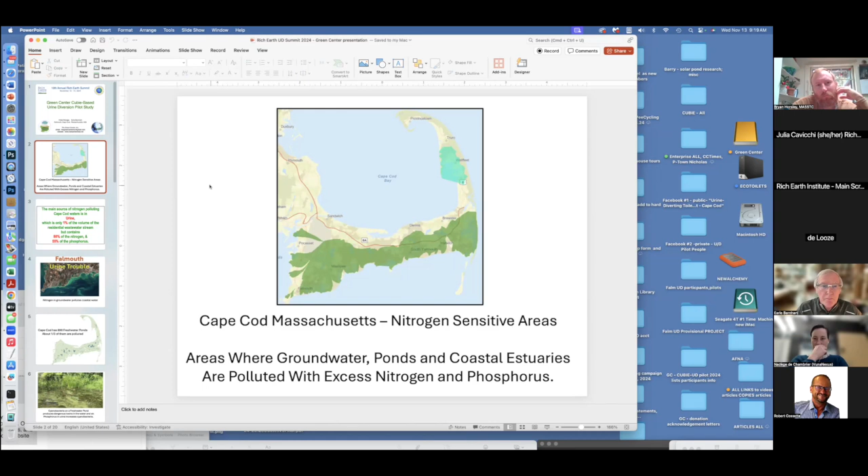And the reason is that the urine that goes into the septic tanks from the flush toilets contains 80% of the nitrogen from the home and 55% of the phosphorus, but it's only 1% of the volume of the water leaving the house. So the most efficient way to control the urine that's polluting the Cape is to stop the urine from going down into the septic tank and into the groundwater and polluting the natural waters.

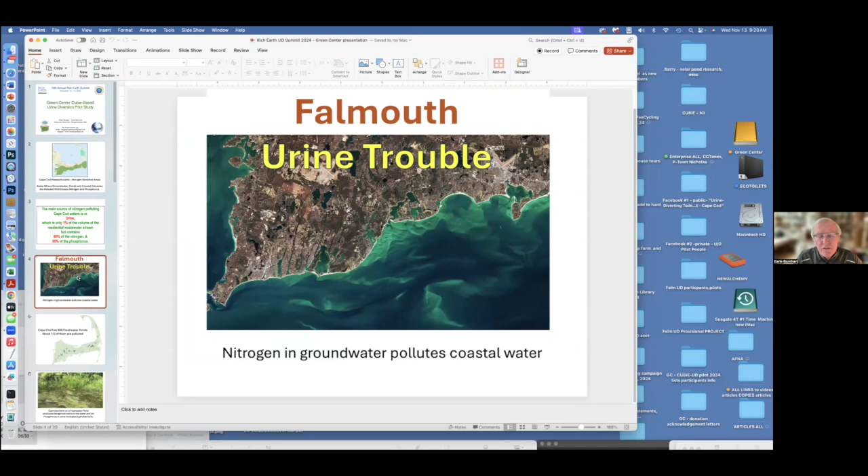Our town is called Falmouth. It has 30,000 people. It's in this picture. And if you look on the shoreline of the Cape near Falmouth, the nitrogen is seeping out of the ground into the ocean and causing pollution and algae growth along the edges, as well as in all of the water bodies on the land.

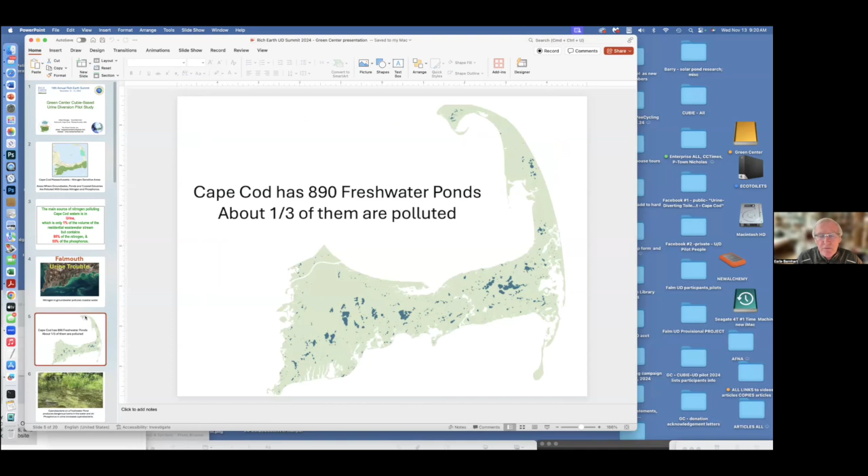Cape Cod has 890 freshwater ponds left over from when there were glaciers here. 1/3 of them are so polluted with nitrogen and phosphorus from the housing that they grow cyanobacteria, toxic, dangerous bacteria on the surface of the water, usually in the summer, and it's poisonous. You can't touch it, you can't swim in it, you can't drink it. If your dog swims in there, your dog will die. It's a very serious problem, and it's one of the major incentives for Cape Cod to try to figure out some way to control the nitrogen.

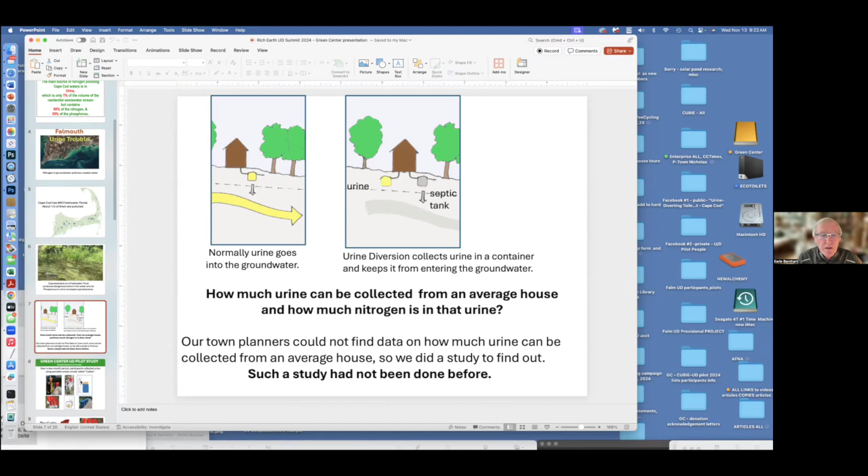When we proposed that the town use this technology, they said, well, how much urine can you collect? And we had someone research it, and there was no good data anywhere in the world for how much people could practically divert and collect. So we decided we would do a study here on the Cape to find out. This study had never been done before.

What we did was we gave out Cubies from the Rich Earth Institute to 41 homes, and they collected urine voluntarily in each home. Each home averaged about 1.5 people who were doing this. They put the urine into Cubies, then they put the Cubies collected and put them into 55-gallon plastic drums. And then for 2 months, we did that.

We use Cubies because they are perfect for this experiment. They're cheap, they're easy to use. Men and women can both use them. They're portable. You can put them in your bathroom. You can put them in your back porch. You can put them in your garage. You can put them anywhere. They have a ball in the Cubie's funnel so that the urine goes down, but the air does not come up. Odors don't come up.

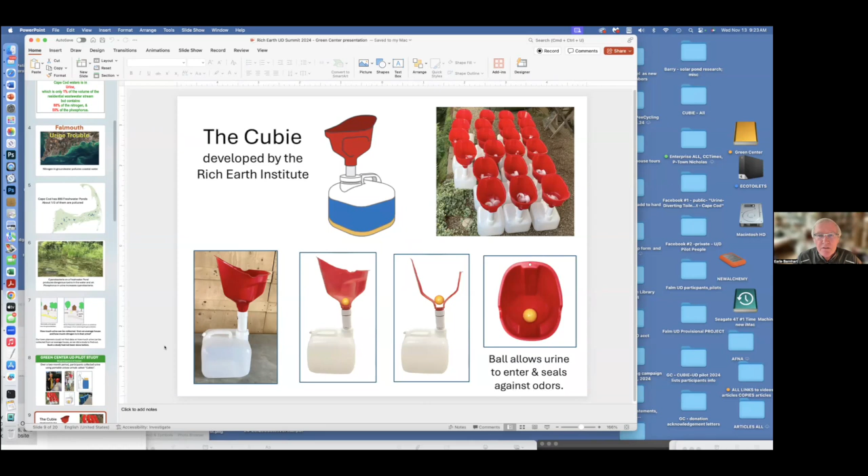This is a standard Cubie that we used. Men and women can both use these Cubies. Men stand up in front, women squat down behind. And in 1 year, if a person collected all of their urine, you'd get 120 gallons per person. We collected for 2 months, and then we extrapolate up to a year to see what would happen if you did it for a year.

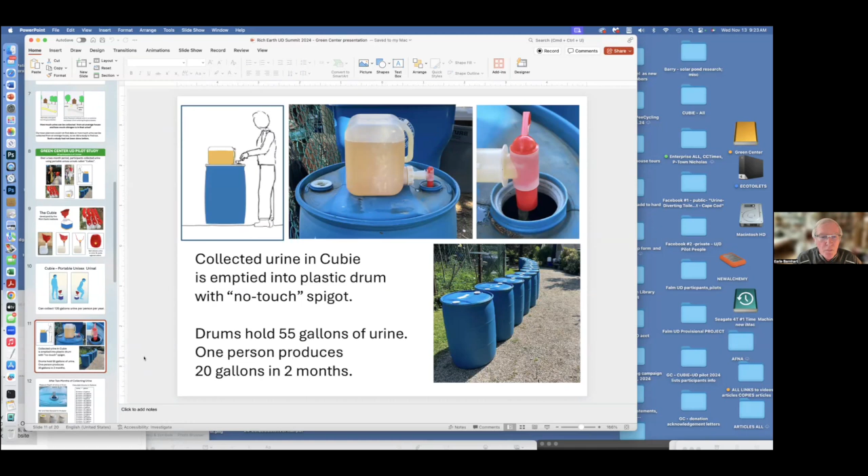So the logistics of this was the person would collect in the Cubie. They would dump it into the 55-gallon drum with a no-touch spigot developed also by Rich Earth. So that was necessary for our Board of Health so that people did not touch the urine at any point in the process. We collected the urine for two months in each home. At the end of the 2 months, we would measure the depth of the urine in the tank. And depending on how deep it was, we calculate how many gallons were in there.

And then a sample was taken from the drum to test for the amount of nitrogen and phosphorus in it. And it was stirred first because the struvite crystals sometimes go to the bottom and should be included in the sample. So it was stirred and then tested. The sample was taken to a county lab, so it had a high quality proof of what was going on in it. It was the Barnstable County Water Lab.

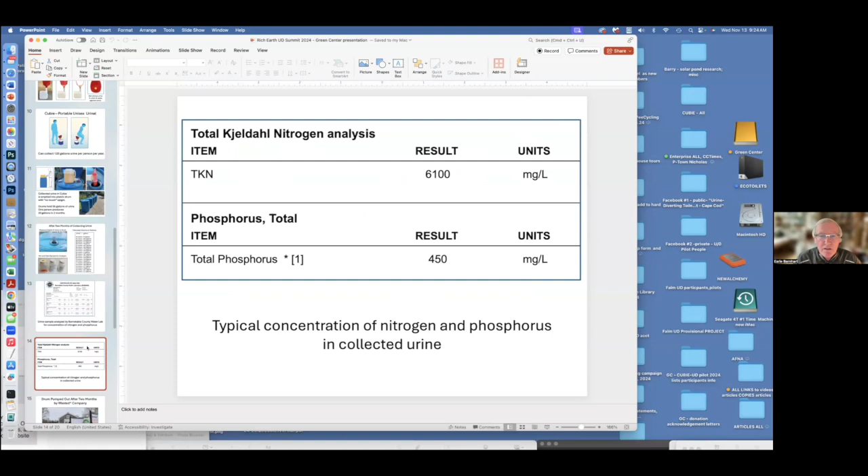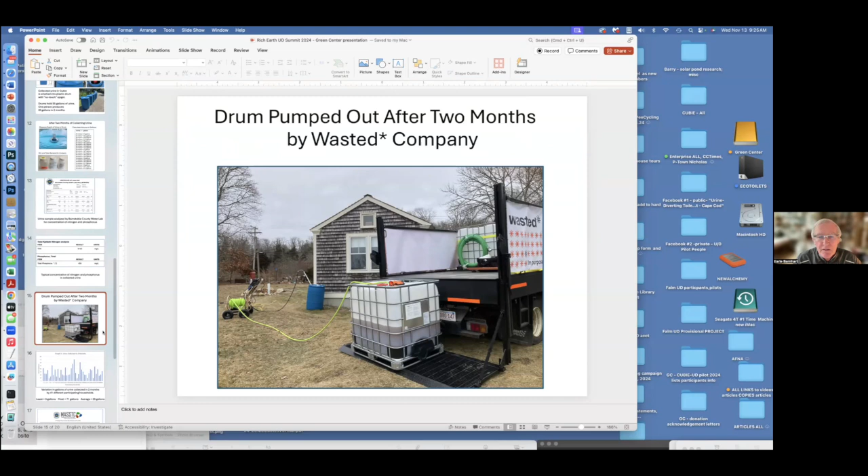Each home then was given results of how much nitrogen was in their urine. And then with the amount of nitrogen in the urine and the amount of urine, you can find out how many pounds of nitrogen was collected in these drums. At the end of the 2 months, we had Wasted come by, pump out the 55-gallon drums, take it away, and take it to an approved disposal place.

For each of the homes, different amounts of urine were collected. Some collected a lot, some a little, depending on how many people did it, how often they did it, whether they went away from home for a while. These were like average conditions for average people. The least collection was 9 gallons, the most was 71 over 2 months, and the average was 29.

The science of this project was managed by the MASSTC Alternative Septic System Test Center on the Cape. Bryan Horsley, who's at this summit now, was the person who did the measurement and the sampling and the collection and wrote the report. The final report was published by MASSTC, and it described the process, it described the findings, and it described the implications of the advantage of this.

And the basic quantitative information was it showed that a 2-month study, typical household, 1.5 people, if you extrapolate that up to a year, would remove 9.7 pounds of nitrogen and 0.64 pounds of phosphorus from a home using Cubies voluntarily in this manner. This is about the same amount of nitrogen removal as a sewer when you do the numbers, and it's at a tiny, tiny fraction of the cost of a sewer.

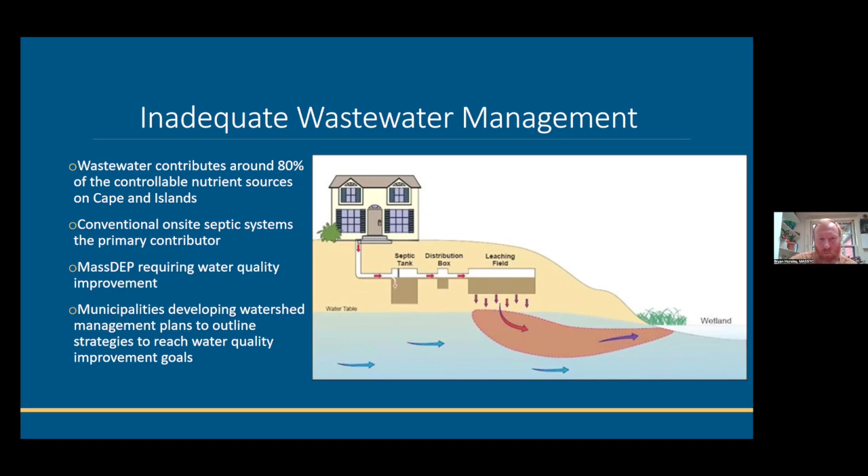So the Massachusetts Department of Environmental Protection, our state environmental regulatory agency, is requiring that towns do something about this. The regulatory teeth are into the towns, asking them to come up with what they call watershed management plans to improve water quality in all of those impaired waters. And those watershed management plans entail a variety of strategies, which I'm going to get a little bit more into here.

Like I mentioned, individual towns are working on planning to improve water quality through their watershed planning. Many of them are relying on expanding their sewer systems, so they're actively working on that. Some of the problems with that, though, are one, that it's extremely expensive, and two, that it's really going to take decades to implement those systems.

And then the other problem with relying on sewering and watershed planning is that at best, the maximum sewering plans will cover about 40% of the homes on the Cape, leaving the majority, 60%, to still be addressed with on-site either advanced septic systems or other approaches.

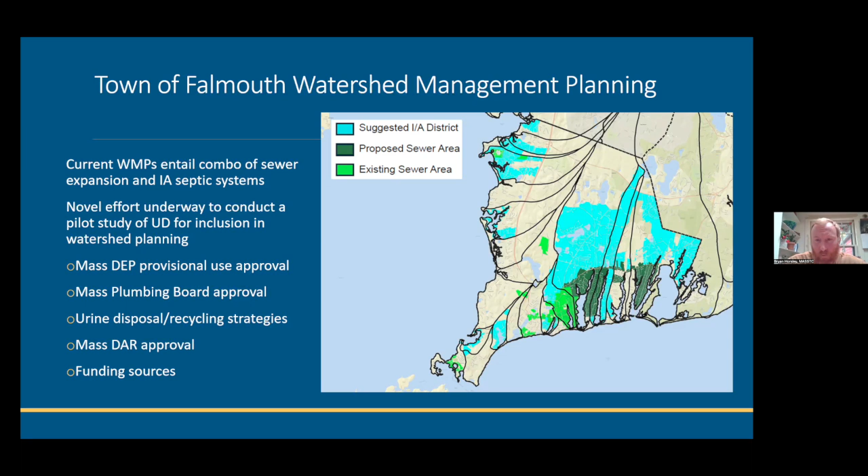And then, of course, we need funding because, as the next slide will describe, we're needing to install 50 urine diversion systems and sample and monitor them for a period of 3 years in order to meet the requirements from our Department of Environmental Protection.

So that's the plan. Right now we have a list of around 150 people, which the Green Center have helped compile among other colleagues. And we're looking to install 50 urine diverting systems mostly in residential homes, and then sample and monitor them for 3 years. And the goal of that is to gain a better understanding of what total nitrogen or phosphorus load we can remove from the watershed. And there are two different ways of looking at it.

One is sort of cumulatively, if we collect all the urine within an impaired watershed, measure the nutrient concentration, measure the volume, then we can say exactly how many pounds or kilograms of nitrogen we removed from that watershed, and hopefully the town will be able to get credit toward meeting their water quality improvement goals.

Bryan, we've got 1 more minute. Sorry, what was that? We got 1 more minute on your presentation. Okay, this is my last slide.

And so the alternative way to look at it is by measuring the remaining nitrogen content in the septic tank. What that will do is allow us basically to see how much nutrients are left over after doing urine diversion, and that will allow sort of an apples to apples comparison with the advanced septic systems.

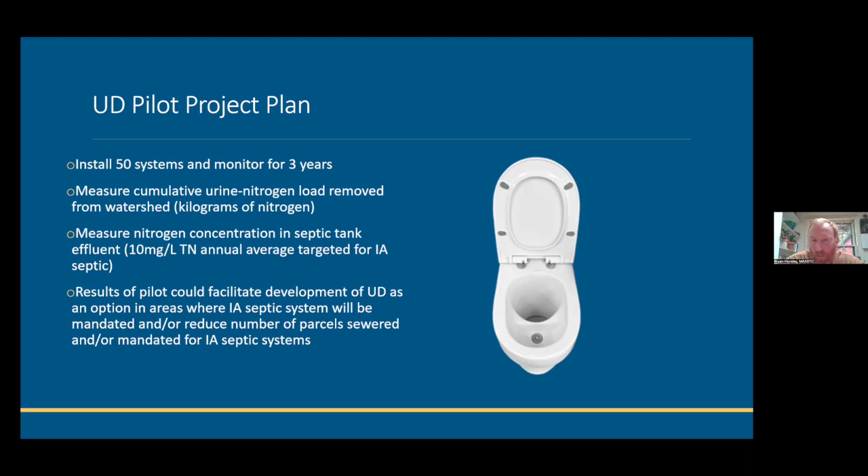And the overarching goal of all of this is to explore whether urine diversion can remove enough nutrients from these impaired watersheds to work towards those water quality improvement goals, and potentially offset the need or reduce the need for expanded sewers or mandated installation of IA septic systems or advanced treatment septic systems.

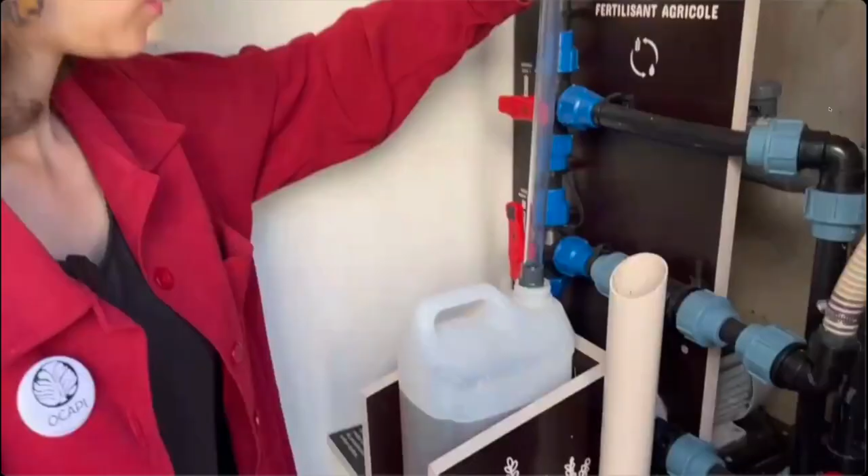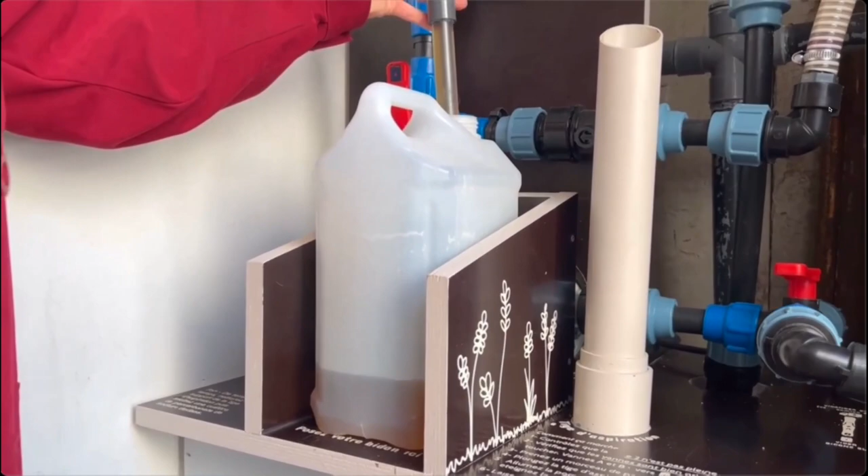So I'm going to make a demo of the pumping station. So pee cyclers put the 5-liter container at the place. Then people open the container, take the pumping stick and plunge it in the 5-liter container. After that, you just activate the pump and it will pump out urine in the tank. And it's done. There is a vent that brings all the air from the tank outside of the building so that you never smell the air of the tank. They also have soap available and hand sanitizer.

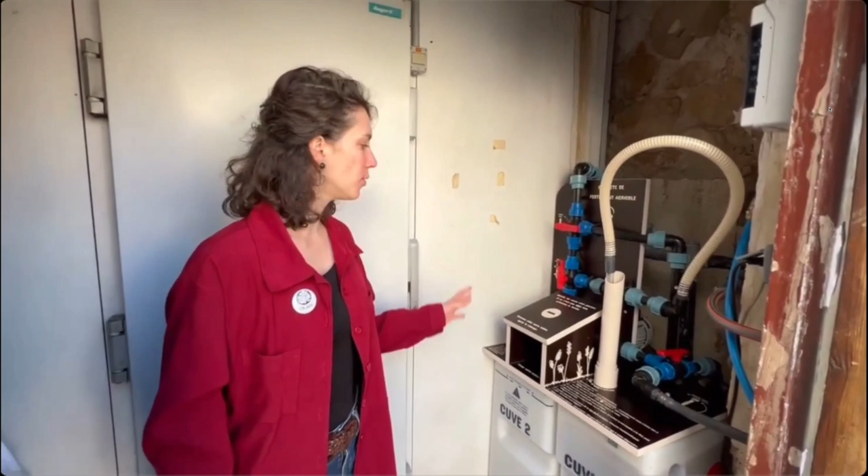When the 300-liter tank is full, then the pee cyclers have to contact the farm, but also to put this sign on the top of the pumping station so that people know that the tank is full and you can't put your urine anymore in it. Urine collection by the farm. When the farm comes for delivery, they can get urine in their truck. They just have to turn these valves so that it will reverse the pumping system. Thus, it means that when you activate the pump, it takes urine from the tank and brings it outside in another pipe. We installed specific tanks in their delivery trucks so that they can transport urine safely.

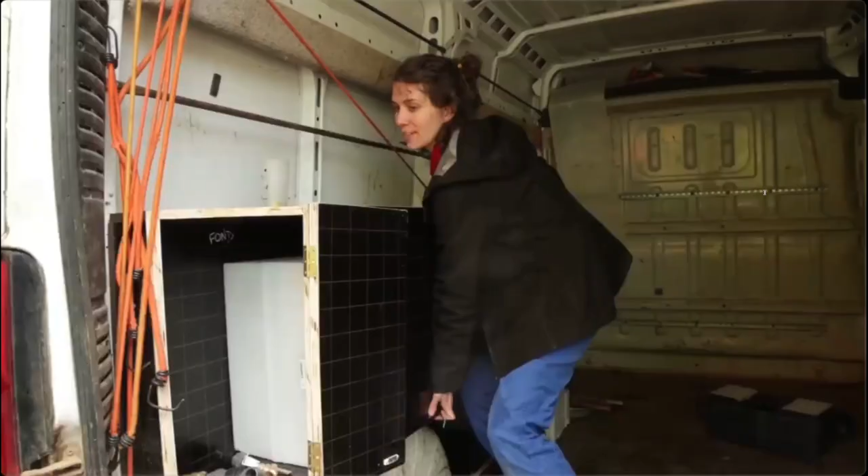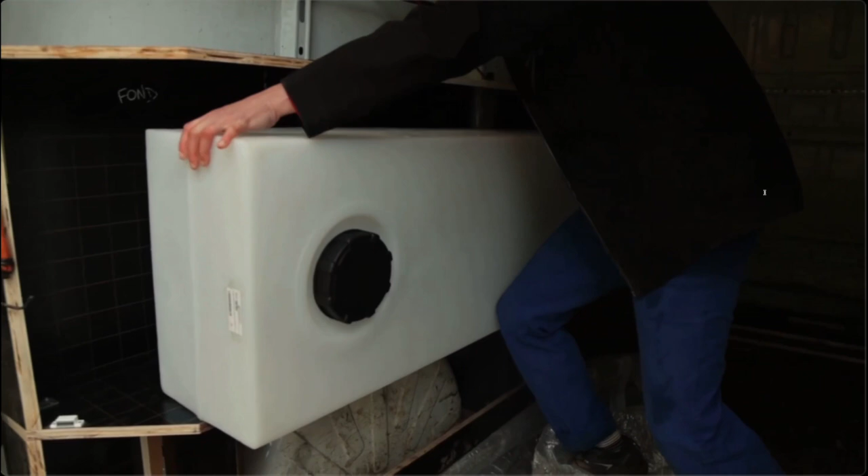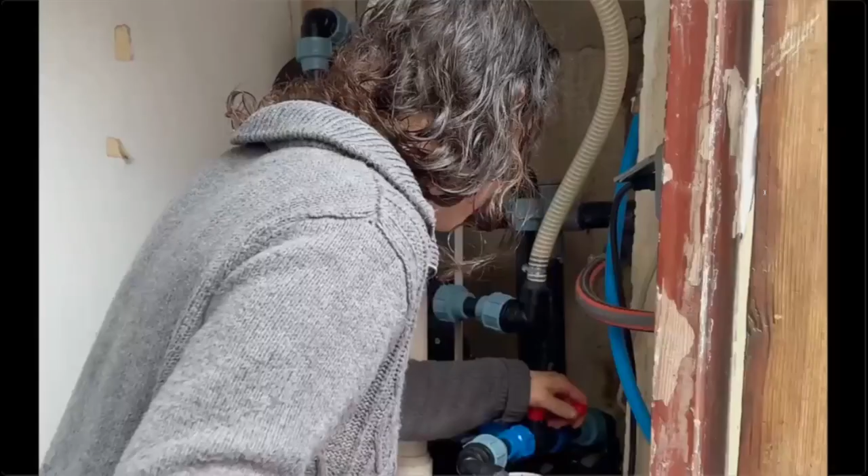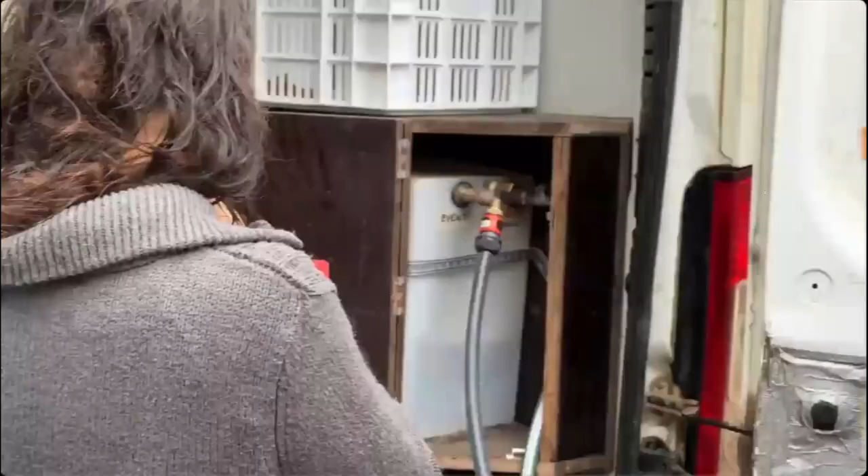We decided to install them permanently because other configurations with foldable tanks or portable tanks didn't seem convenient for the farmers. Since the truck is totally full of vegetable crates for the outward journey, we decided to install the tanks above the wheels in the back of the truck, where no crates can fit. As I said, farmers use the same pump as pee cyclers. They just move the valves to modify the pumping configuration. They can fill their truck in about 15 minutes, which is not that fast, but okay for the time they have. Also, the capacity of the truck is right above the capacity of the urine depot so that it would never overflow in the truck.

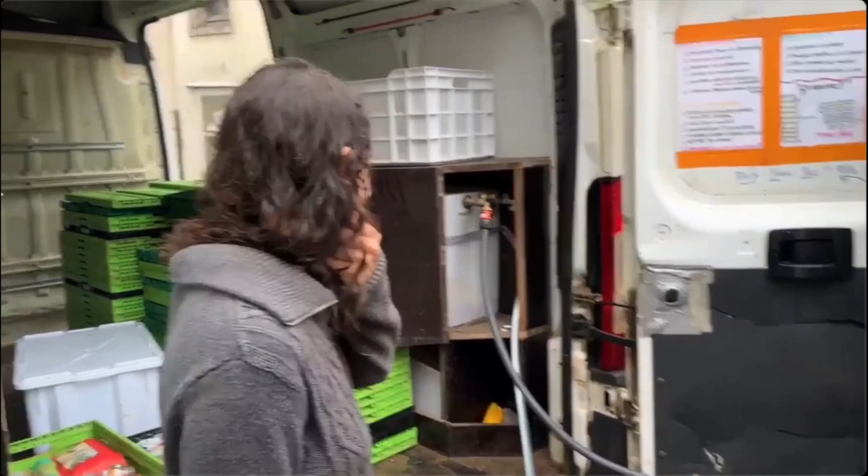Everything was designed in order to prevent spills and odors and to make sure that no one is exposed to urine. Farmers just connect pipes and activate the pump. Small valves prevent piping from dripping. Odors are managed through a vent that is connected on the tank and goes far from the handler. Then, when their tank truck is full, the farmers are ready to bring back nutrients on the farm.

Urine transfer at the farm. The farm is located 90 kilometers away from Paris in the south direction. When they come back from delivery in Paris, they empty the urine tank from the truck to a bigger tank staying at the farm. They also have a second pump available at the farm for this second transfer. Since people from the farm don't have a lot of time for this task, we paid attention to the fact that they don't have to manipulate urine or dripping pipes. Thus, they have a box available for urine transfer with dedicated pipes and the pump. They connect the pipes to the tanks and the pump. Everything works with easy connection devices so that you can plug and unplug the system very easily.

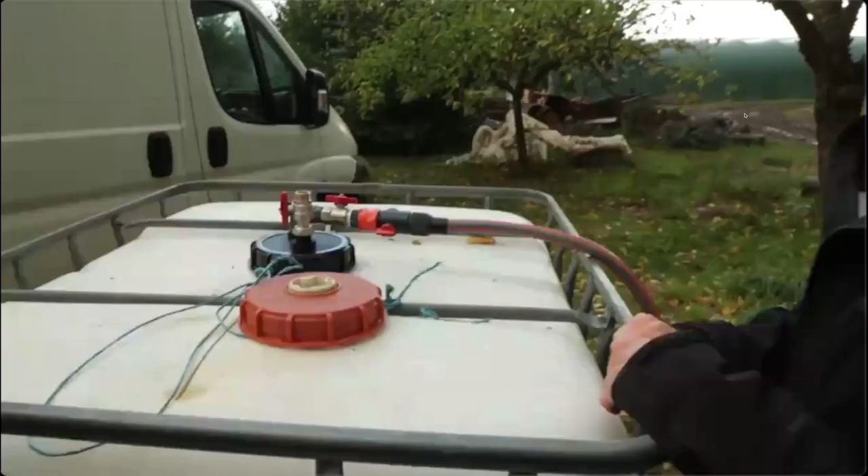For example, we designed this simple cap for the storage tank so that pipes are not plunged directly in it, which would have been very unpleasant to unroll them back afterwards. Pipes are directly connected to the cap. All these precautions with pumps and piping connections were applied because we think that otherwise the project would have been too constraining for people from the farm.

Urine fertilization. For treatment, urine is stored on the farm at least for 6 months, as recommended by the World Health Organization. For now, we only made small tests on the farm in 2024. Indeed, we preferred to focus first on the design of device and protocols for offering convenient logistics between inhabitants and the farm. This farm has vegetable fields but also cereals and flowers. We applied urine on few crops either with a watering can or dripping system.

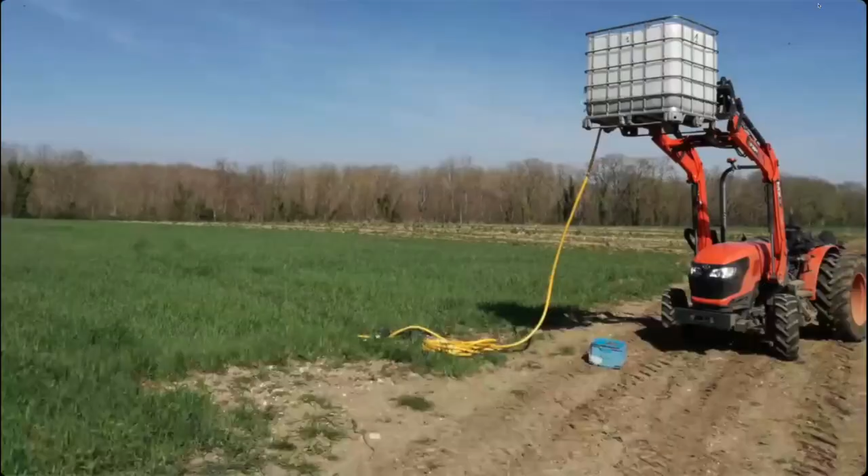As I said, because we didn't have enough time, the farm only proceeded on small fertilization tests, but no real agronomic testing or big-scale fertilization. For example, urine was applied on a strip in the middle of a wheat field. Even very small, this kind of test had major impact on the farm's willingness to follow up the project and proceed with urine fertilization for the coming years.

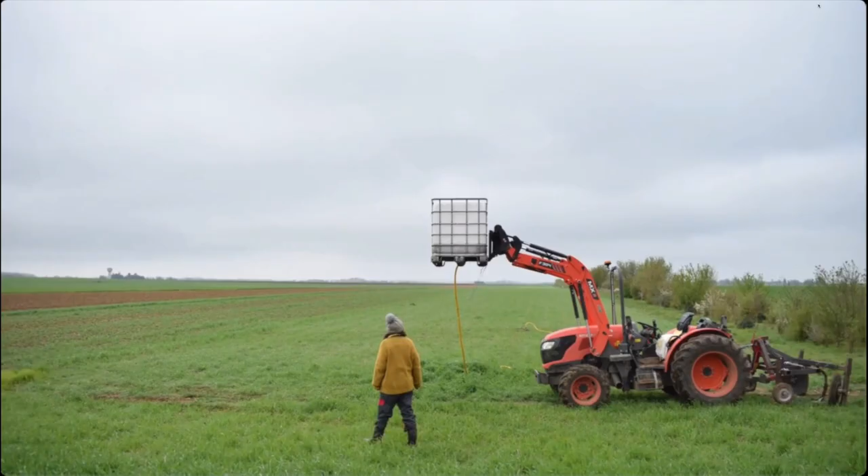These first fertilizations were also an opportunity to investigate the existing tools for urine application, following the WHO instructions for safe conditions. We used, for example, a fertilizer Venturi injector or a motor-driven pump. After these first explorations of urine application in 2024, we decided in January 2025 to take time to develop a specific tool for urine injection in the soil. This tool is also presented by my colleague Loïc at the agricultural session. Since urine has been collected for about 1 year, we hope to do more urine fertilization with this farm in 2025.

For now, we have about 25 pee-cyclers, and unfortunately we won't be able to get more than 50 people in this configuration because the tank of the urine depot and in the truck are pretty small. That said, our goal was to demonstrate that it is possible to organize a urine collection project based on a CSA in a dense urban area without changing your toilet. This is a very symbolic project, and our idea was to make a functional demonstration so that other groups of people can copy the system and adapt to their own context.

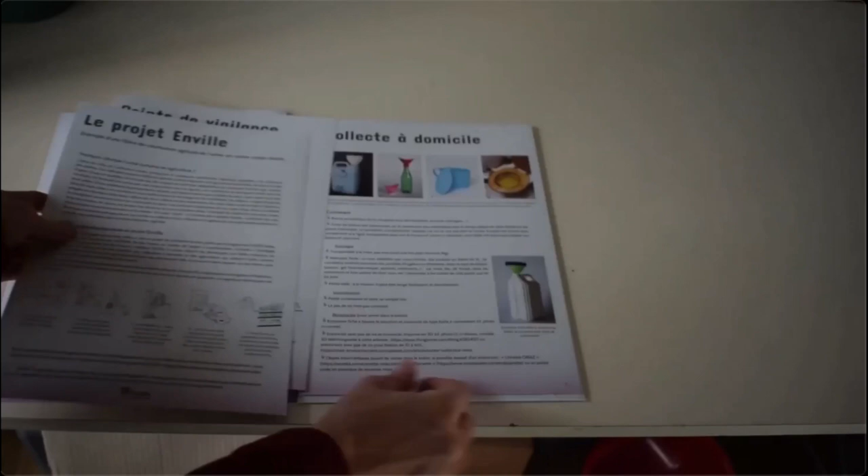On that purpose, we published a report explaining everything we've done. And we also published all the plans of the device we developed. The documents are available online on the website of OCAPI program. The system is functioning since January 2024, but we made a great opening party on September 2024. That was a good opportunity to raise awareness about urine source separation, and we've got a lot of journalists coming. From this moment, we got at least 5 other CSA groups around Paris and further in France who are willing to develop similar projects.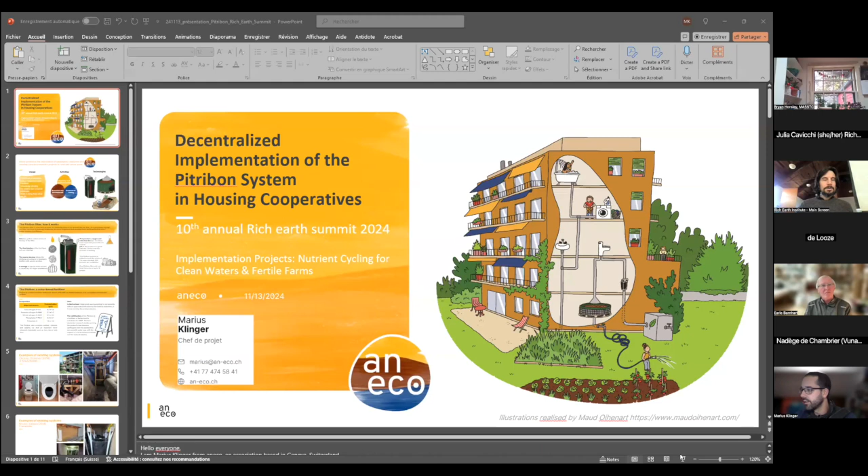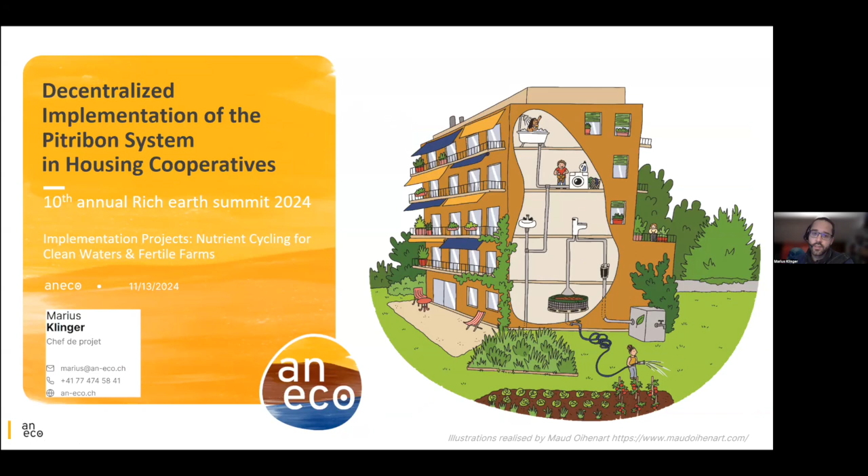So as presented, I'm Marius Klinger from Aneco, a Geneva-based organization. And today I'm going to quickly present Aneco, the Pitribon process, the existing pilot installations and the upcoming systems, as well as the business plan choices for the future.

So at Aneco, we promote the valorization of wastewater resources and develop circular sanitation projects in rural and urban areas. And in order to understand our choices, we try to follow as closely as possible our values, which are horizontal governance, knowledge sharing, which also means that we don't patent our technologies, but we protect them with Creative Commons licenses. And we also look for nature-based and low-tech solutions.

Our 3 main activity axes are the expertise and implementation of decentralized sanitation solutions, research and development, and awareness raising. The main technologies we are developing and promoting are vermifiltration to treat the wastewater, the Cacarosel, which is a dry vermicomposting toilet, and the Pitribon filter, which is a stabilization technology for urine, which will interest us today.

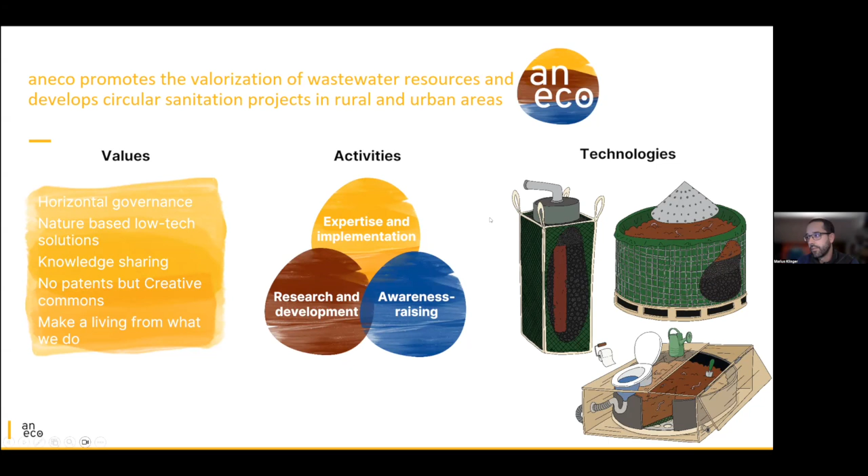The Pitribon process is basically a gravity-driven biochar filter in which nitrifying microfauna stabilizes the urine that percolates through it. One treatment unit, like you see sketched in the middle of the picture here, has a diameter of 60 centimeters and a height of 1 meter 70 centimeters, and is able to treat the urine for 15 people equivalent, to give you an idea.

The urine arrives on the top of the filter in the feeding tank and slowly percolates through the different layers of biochar, fine biochar, then coarse biochar chips, in which the urine is stabilized by nitrification, basically. Here, the most important parameters to control and to monitor for the process to work are temperature, of course, oxygen availability and retention time in the filter.

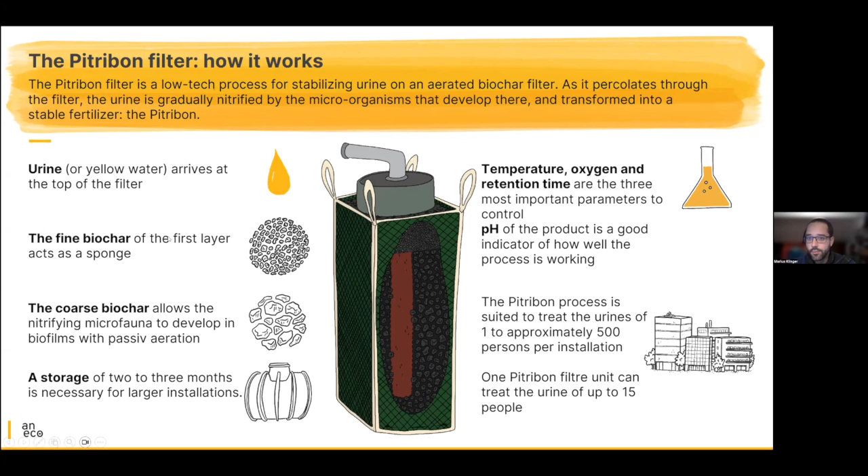For us, the pH of the product is a very good indicator of how well the process is working. Smell is another one also. In good working conditions, there is no smell, and as soon as you have smells, you know that something bad is happening. We think this system is suited for small to medium installations from 1 to about 500 people equivalent. And to increase the capacity of the treatment, you need to add more treatment units like this one in parallel, basically.

The composition of the product itself is very similar to urine composition, with the specificity that the nitrogen is split in two between ammonia and nitrate because of the nitrification, and the pH is around 6. In Switzerland, large-scale use of human urine products is not possible without a certification by federal authorities, like Vuna has done with the Aurin quite some years ago already.

So in order to get this certification, we need to provide evidence about the innocuity of the product and evidence that the process reduces pathogens and micropollutants. And the research that is needed to obtain this certification has slowly started this year, and will really start fully next year. And we are aiming for a certification by 2027.

Now I'm going to quickly show the different pilot sites where the filters have been implemented. The two first pilots were installed in the housing cooperative Equilibre in Geneva. The first one here in Cressy in 2018 with urine diverting dry toilets. For now, the filter treats the urine from 3 of the 13 households that live there, and is constructed in the basement of the housing cooperative. And there is a plan to connect all the households to the treatment.

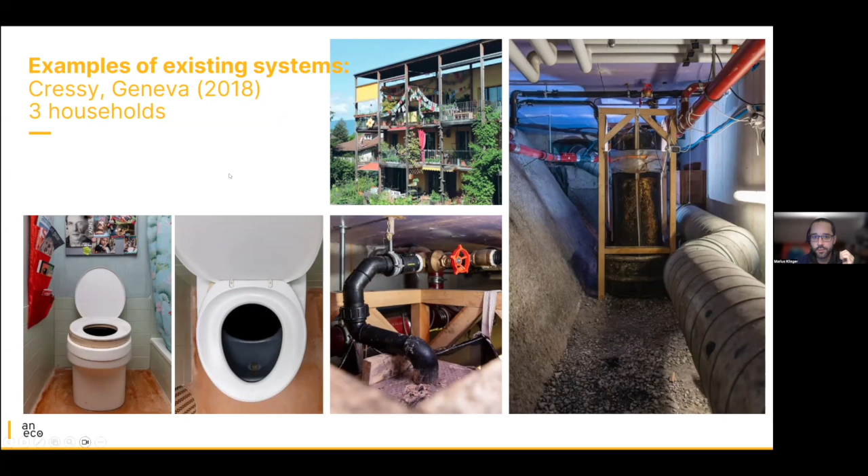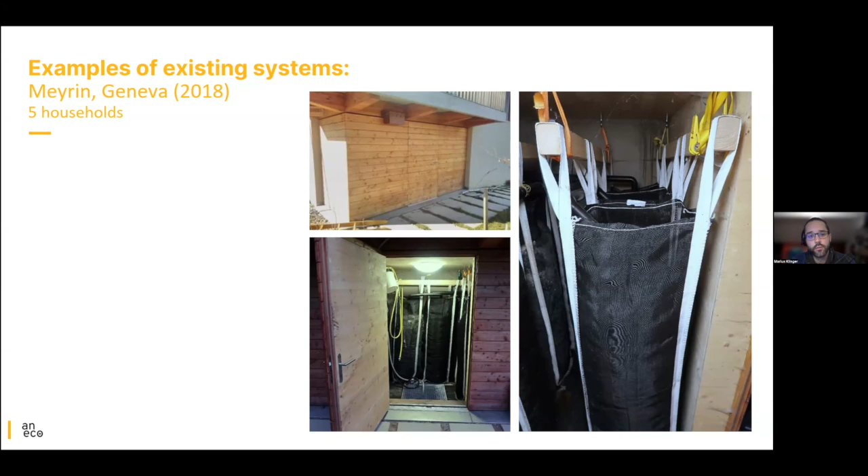The second one is in Meyrin, also in Geneva, constructed also in 2018. And here the system is constructed outside in a little shed below the apartments that are connected to the system. For now, there are 5 households connected, 10 more can be connected to the system. And here, the toilets that are connected to the system are the Wostman urine separating flush toilets.

Recently, we had a new unit installed near the Alps for a new family house, which needed to treat all of their wastewater. We separated the urine with the Laufen Save! toilets and installed also a Pitribon system there.

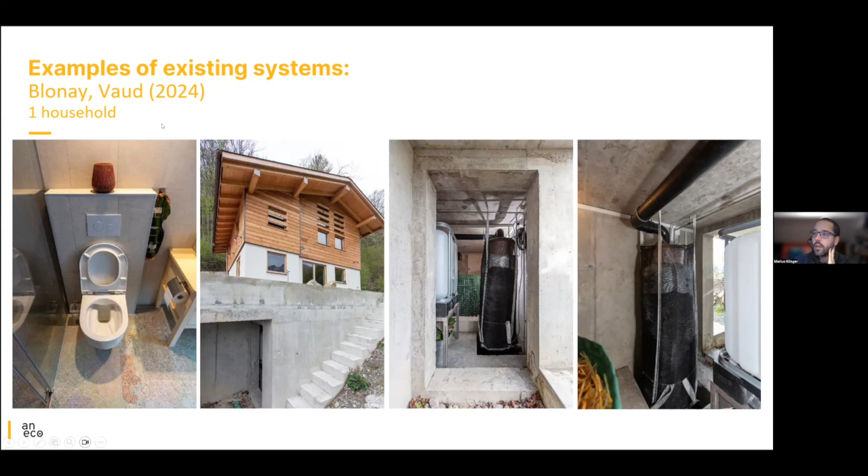And very recently, also near Paris, an installation was constructed, where the system must treat the urine from many urinals in one office building. The annual volume here is estimated at 18 cubic meters, and I'm not sure whether they have already started operation or not. This has to be followed up, basically.

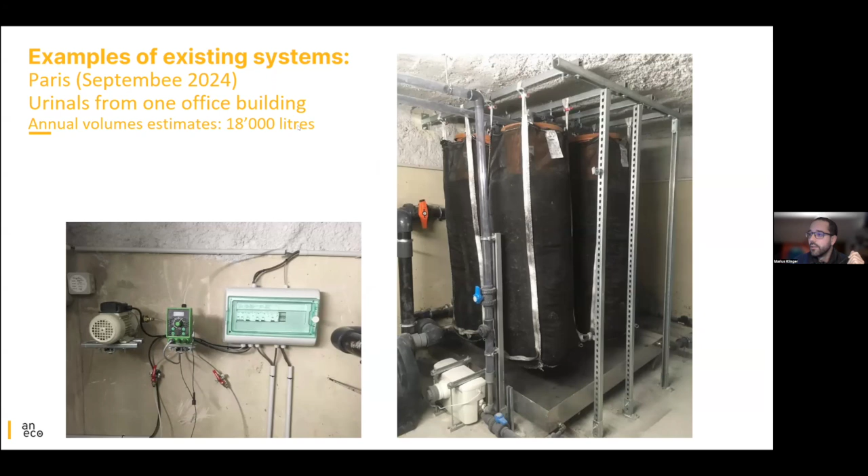Now, except from this last system, we're mainly working in Switzerland, and actually mostly in Geneva region. And with the next planned upcoming system, we are also changing scale with the next system in Archipel here, which will treat 100 people equivalent urine production, and that should start operation around the end of next year. All these future projects are basically housing cooperatives that decided to implement in the Geneva region urine separation, and for most of them also wastewater, decentralized wastewater management and treatment.

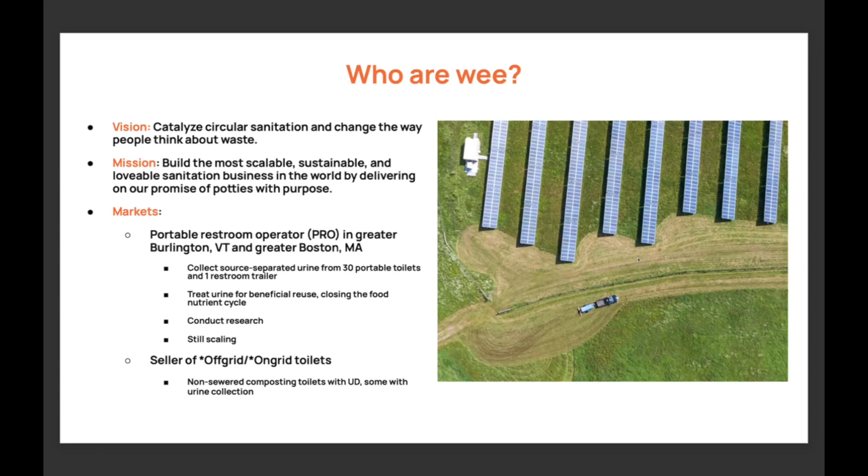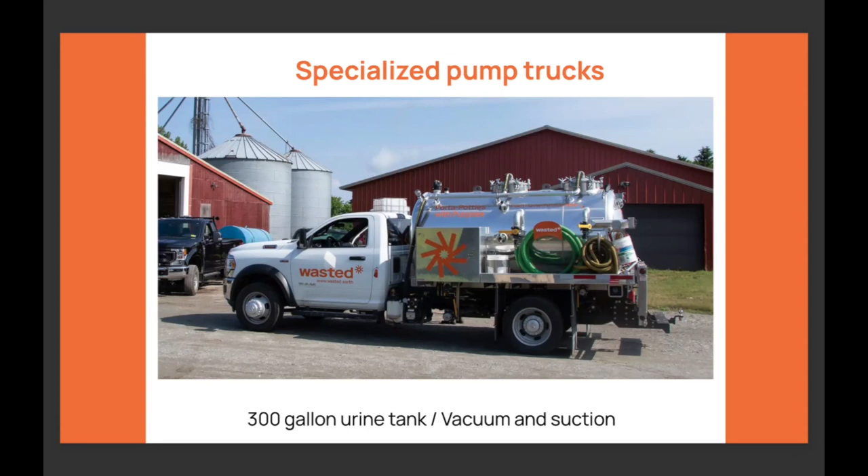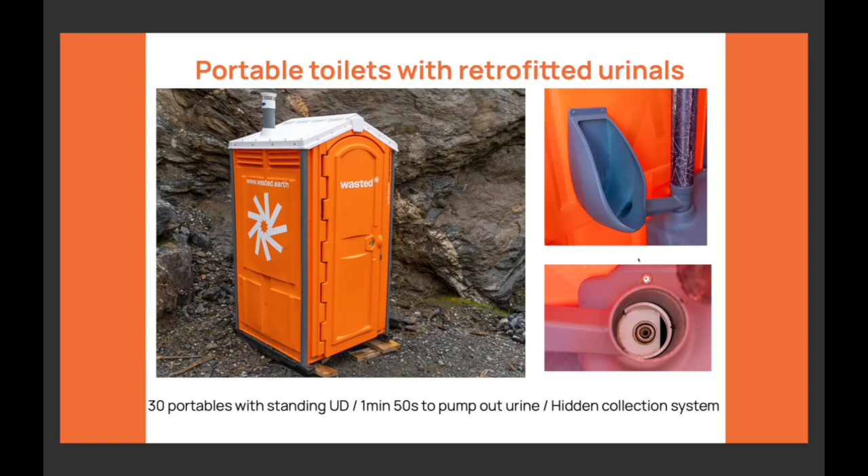Now that truck is used to pump from 30 portable toilets with standing urinals. So those urinals divert to a bladder hidden within the mixed waste tank, so it doesn't look like a urine diverting toilet at all. Now this was a relatively costly retrofit, but it served as a good proof of concept, and we're looking to make some improvements in the next iteration.

We pump also from our VIPee trailer. So this is a restroom trailer with 2 of those off-grid style toilets. So that toilet there, that black thing in the bottom is a conveyor belt. It brings poop out the back to a chamber, and pee runs down the front into some plumbing and a collection tank. So this is relatively new, but it's increased our urine collection about 20% in the weeks it's been in use. And the good thing about this setup is it collects from both the standing and the sitting peers.

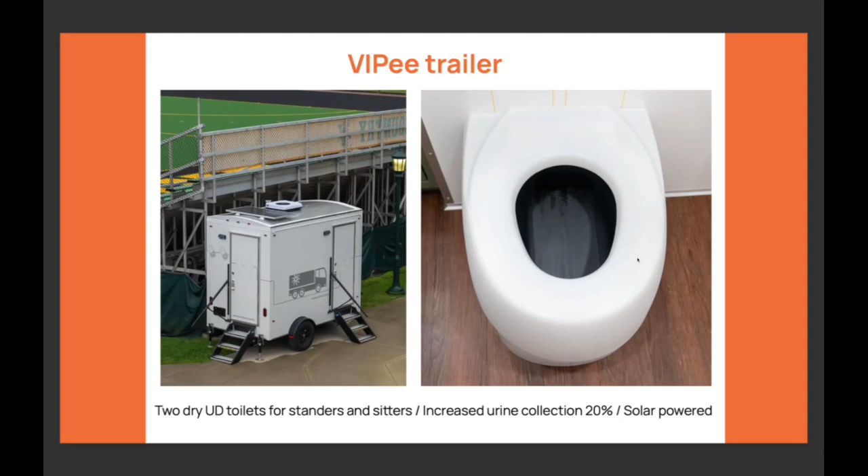And lastly, we collect from on-grid installations. Those are permanent or semi-permanent outhouses with that urine diverted through that off-grid toilet into a collection tank.

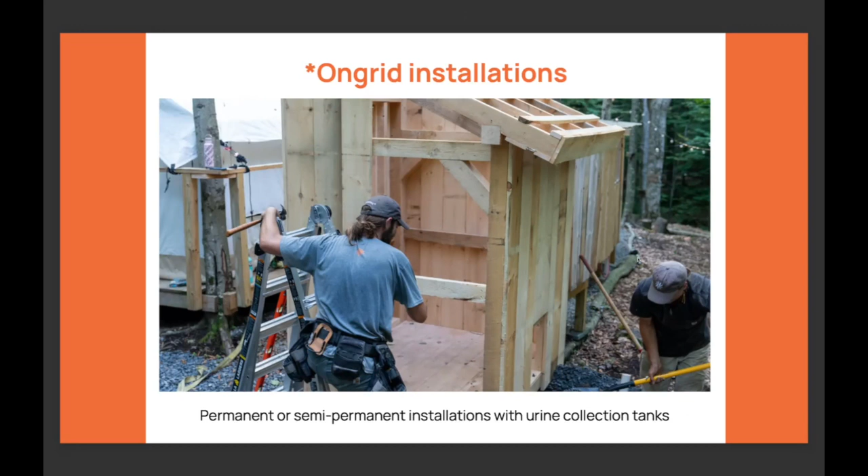Okay, how do we treat the urine? We have a very simple treatment train centered around technology built by Brightwater Tools. So to the left there, we have our Brightwater pasteurizer, and in the back is our Brightwater struvite reactor. Treatment begins with urine being pumped into the building under the truck's pressure.

We then pasteurize it for pathogen reduction following the EPA's 503C biosolid standards. After that point, the fertilizer is considered legal for use in Vermont. But because we work in the Champlain Valley, which is phosphorus constrained, we take this a step further and strip the urine of its phosphorus as mineral struvite.

So with the addition of magnesium chloride, or pet-friendly road salt, the struvite spontaneously drops out of solution, and we filter and wash it. So this creates 3 real end products. Those are pasteurized whole urine with the phosphorus in it, pasteurized stripped urine, which we more often land apply, and struvite, which is our solid fertilizer.

So we've taken a few measurements from our tanks to estimate reactor performance, and we see near complete reduction of phosphate, about 85% reduction in total phosphorus, and measuring our wash water, only about 0.1% of the phosphorus in urine ends up going down the drain.

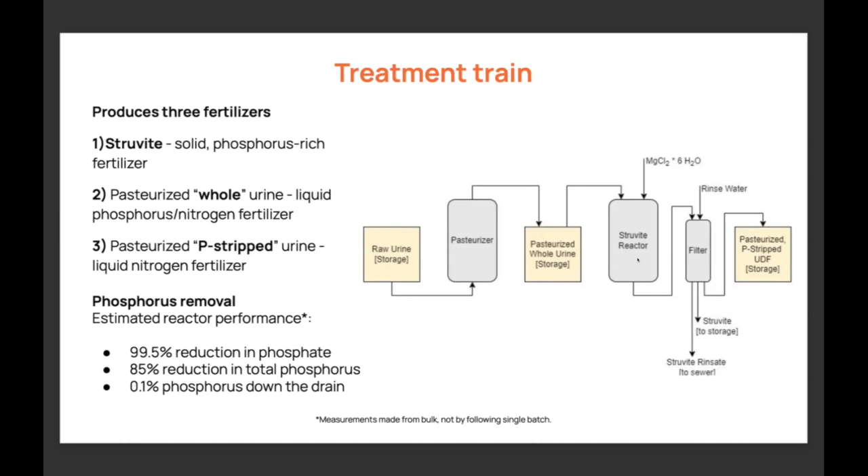So this treatment costs us operationally about 33 cents per gallon, and we can compare that to 10 cents a gallon, which is the rate the wastewater treatment plant charges us to dispose of any kind of waste, urine or mixed waste. So we're not too far off, and it's good to keep in mind that the 10 cents they charge us is not at all reflective of their true cost, because urine is such a high strength stream and because it's so costly to treat for nitrogen.

And most of our cost here is labor, and much of that labor is spent just watching urine as it's pumped into the building. So with any real sort of scale, automation or engineering controls can bring that cost down significantly.

Okay, what is the quality of the resulting fertilizer? I'm not going to spend too much time here, but I think it's in everyone's interest to be as transparent as possible with safety data to help advance regulatory pathways together. So things are going to pop up quick, but if you'd like more information, feel free to email me after the presentation.

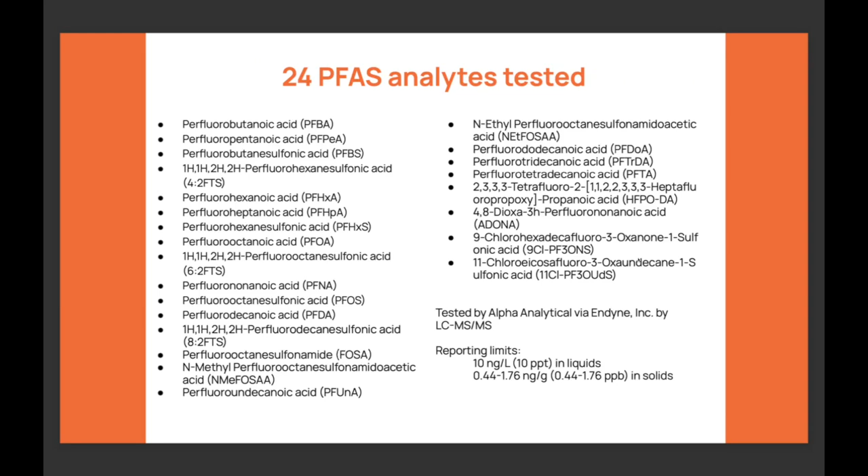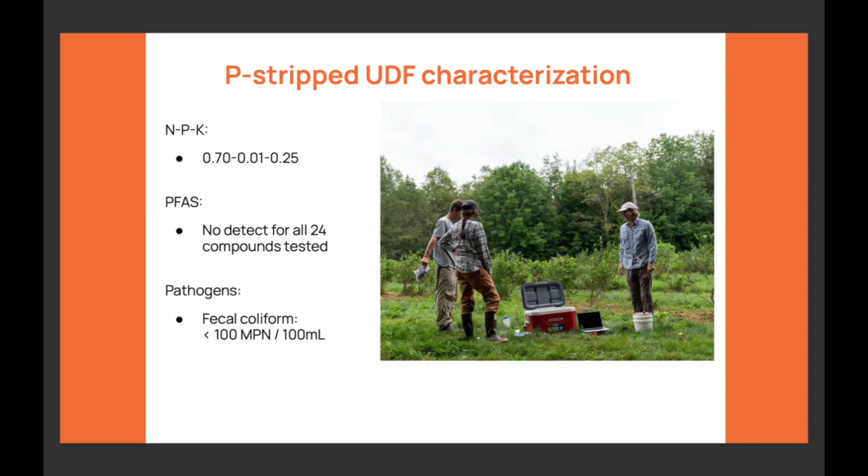So we've tested our stripped urine and our struvite for 24 PFAS analytes, heavy metals, and pathogens as part of our regulatory testing in Vermont. That stripped urine measured no detect for all 24 PFAS compounds tested, and measured no detect for fecal coliform, which is our pathogen indicator. Stripped urine measured at least 2 orders of magnitude below Vermont limits for heavy metals.

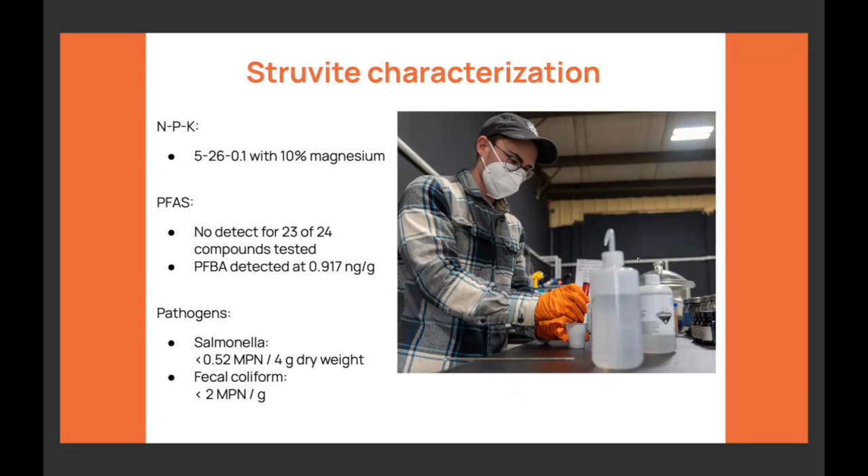In terms of struvite, we measured no detect for 23 of 24 PFAS, detecting only PFBA at 1 part per billion. And again, our pathogen indicators here, salmonella and fecal coliform, measured below detection. Heavy metals in struvite measured at least 1 order of magnitude below the EPA's limit for biosolids, which happens to be most state limits for specialty fertilizers.

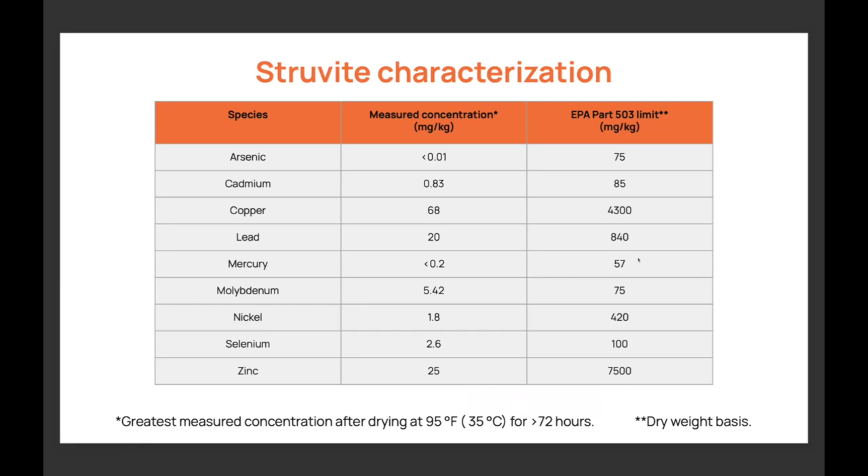Okay, what's next for Wasted? We are very excited to be launching We Bloom, which is the name we've given to our struvite fertilizer. We have some in the back for you all to take home. So this was approved just last week for sale as a specialty fertilizer in Massachusetts, right? It might be the first urine fertilizer in the state, not too sure.

So I'm very excited about We Bloom because it seems the sale of this fertilizer could cover operational costs of treatment and collection and will help us to drive greater urine collection.

So to collect more urine, we're looking to expand our urinal arsenal, and that's with T Blue Star. So T Blue Star is one of our toilet manufacturers, and we're working with them to develop a combination urinal and tank. And this is something we could literally snap into our existing toilets with no other changes. So it's a very attractive option.

And to do so in Vermont would bring on another 100 or so toilets to collect about 10,000 gallons per year. We're talking with Massachusetts regulators, the DEP and DAR, to build a processing pathway there. And if and when we get a pathway there, we can drop these into our Boston market to collect about 28,000 gallons per year.

So Wasted is going to continue to lean into the sort of specialty fertilizer, home and garden space, beginning first with We Bloom and hopefully branching next into a nitrogen product, something like an ammonium liquid or a nitrified liquid. And we are very much looking for technology partners in that development.

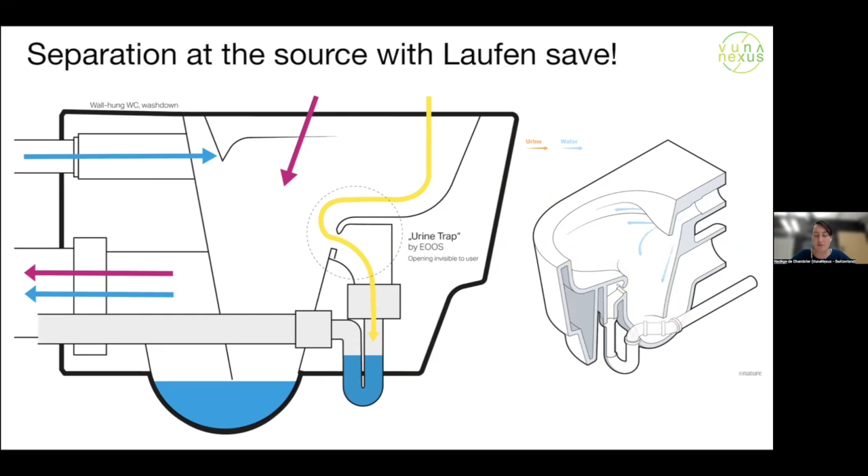When the water flushes, it goes above this trap, and then a little part of the flush at the end can still enter this trap in order not to have urine accumulated in the trap. So this is what is installed in some office buildings here in Switzerland and in France. And we have a treatment system downstairs, basically in the cellar, where we treat the urine directly and make everything on site, where the final fertilizer is also produced.

So I'm just going to go very quickly through the steps. First, we have a collection storage system where urine is just collected from the different toilets of the building. The main part of our system is a biological reactor. It allows for nitrification, partial nitrification, which is basically that we give urine and air to bacteria, and these bacteria eat the urine and transform the ammonium in the urine into nitrate. So in the end, we have a liquid which doesn't smell like urine anymore, and which is ammonium nitrate. And it still contains all other nutrients that you can find in urine, basically.

The next step is an activated carbon filter in order to remove the micropollutants that can be found. And then the last step is a distiller system which concentrates and hygienizes the urine in order to have a final product. Our main product is the urine fertilizer, the bottle that I have here. I'll come back to it afterwards, which is authorized in Switzerland and other countries. And the other product that we can reuse, but not all clients want to reuse, is the distilled water from the distiller as well.

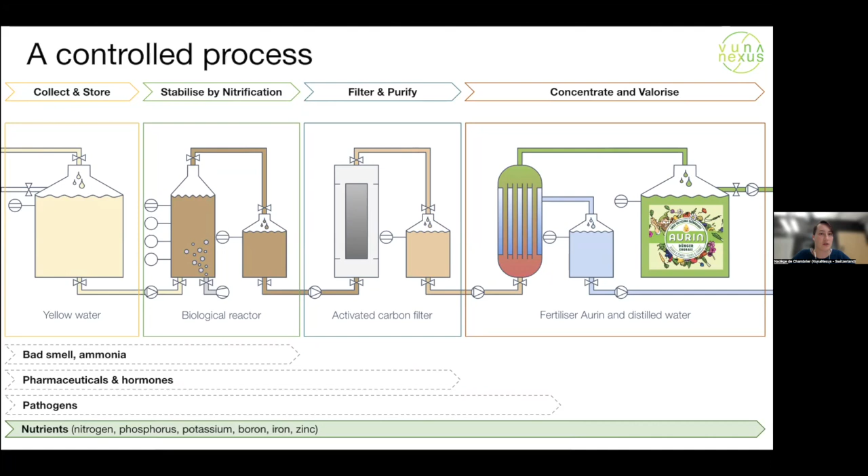So this system was developed for many years at Eawag in Switzerland, which is an important research institute for water research. And basically, we're a spin-off of this institute and took this technology to develop it further. The end product, which I showed you, is a liquid fertilizer. So you can see it's brown. It's because it's concentrated, 15 to 20 times concentrated urine.

It's now authorized in Switzerland, Austria, France, and it's ongoing for Germany as well. In the European Union, it's a bit complicated because some countries need a supplementary permit. Some others accept directly if other countries have already accepted. So we have to do it step by step, but it's on a good way.

Our goal is basically to recycle nutrients, but we realize that on this market, many people don't understand nutrients. So we're trying to translate this also to CO2 avoidance. So I'll come to a few examples of projects that we have now so that you can have a visual idea of what our systems on site mean. And I will talk also about the challenges of those systems.

So basically, this is at the European Space Agency headquarters offices in Paris, France. The European Space Agency is similar to NASA for the Americans out there. And so they are supporting our technology because we work together on this, and they consider it also to be a space technology that they want to use in the future.

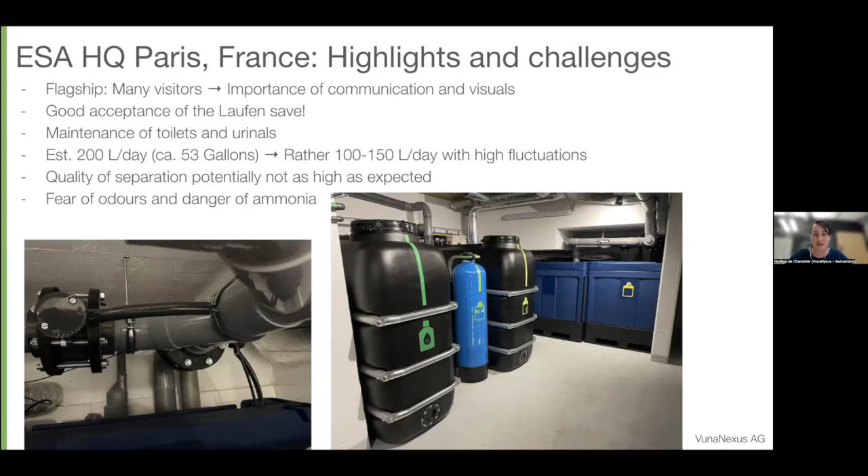So that's just some numbers about this building. The amount of yellow water treated per year is 73 cubic meters. We have about 10% fertilizer production on the volume, so it's about 7 cubic meters per year. We're still ongoing for authorization to recycle the water from the concentration of the fertilizer for flushing of the toilets. So we would be able to basically spare 66 cubic meters of water by recycling it in the system, which at the size of this building is not huge, but it's still quite important and interesting for the client.

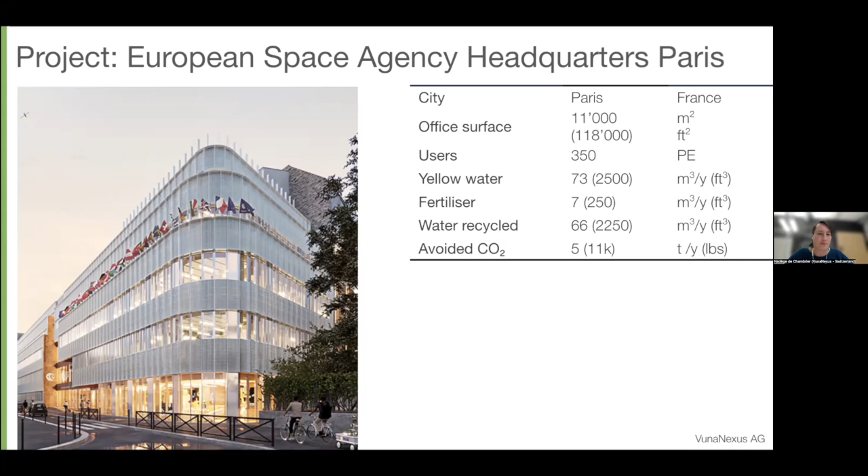I'm going to go on the next project. You can ask me questions about the project later or by email also.

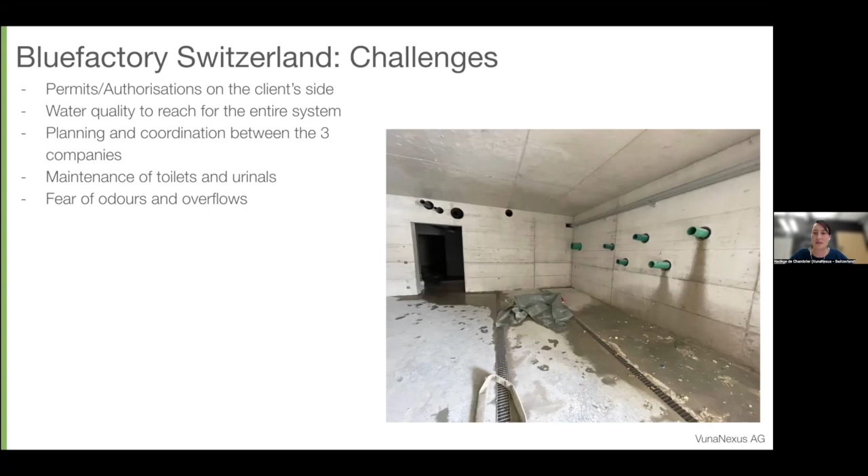Very quickly on how we work in our business model. Basically, the idea is that we install our systems in buildings. The client buys the system, and then we maintain and operate them. So basically, those systems are completely automated. If there is anything that we have to work on or operate manually, we would just receive alarms and be able to intervene online. If necessary, we can also intervene on site, but the goal is only to go twice a year on site for normal maintenance and removal of the fertilizer.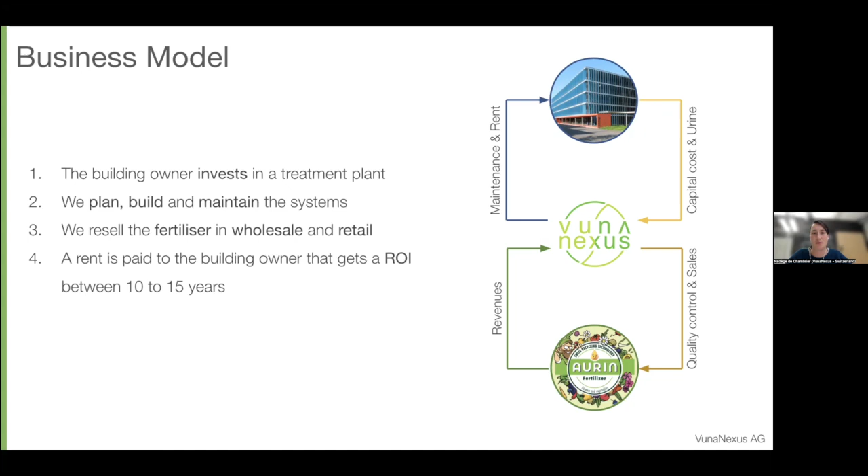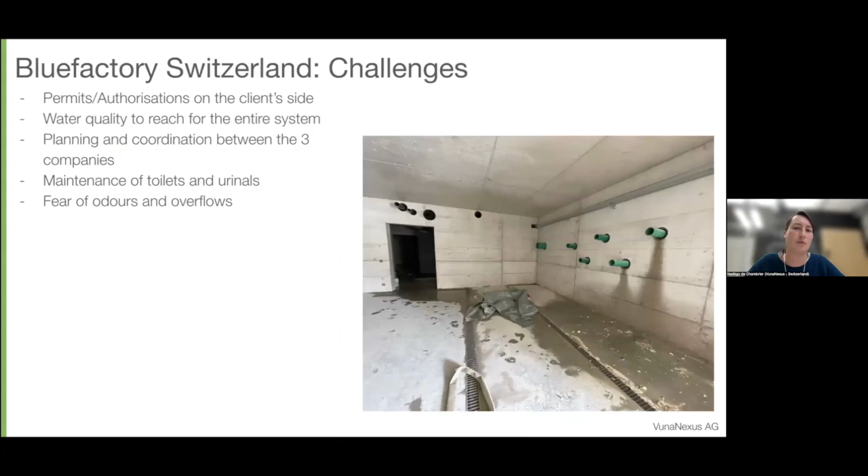So we design it so that the fertilizer is removed twice a year and is stored during this time. The fertilizer should be sold in large quantities, if possible, for the project, because as you saw, we have quite large amounts of fertilizer produced, 18 cubic meters in this case, 7 cubic meters in the other case. So depending on the projects, we expect to sell those bottles or larger amounts, for example, IBCs, cubic meter containers or things like that.

And the idea is that with the sale of the fertilizer, we should be able to repay the operation and maintenance of our systems, including the parts that we might have to change. But also, we want to do a revenue sharing with the building owners so that they get a return on investment between 10 to 15 years, depending on the projects.

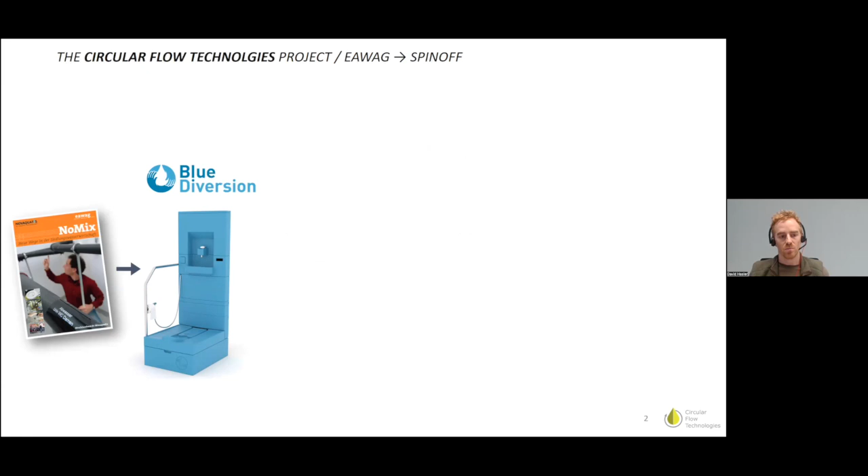There's quite a bit of legacy in terms of on-site wastewater treatment technology development at Eawag, lots of them focusing also on source separation and urine treatment. And the probably most well-known are Blue Diversion and Blue Diversion Autarky, which were developed in the course of the Reinvent the Toilet Challenge. So we started with our project Circular Flow Technologies after Blue Diversion Autarky, and the technology we're developing is based on the urine treatment that was developed in Blue Diversion Autarky.

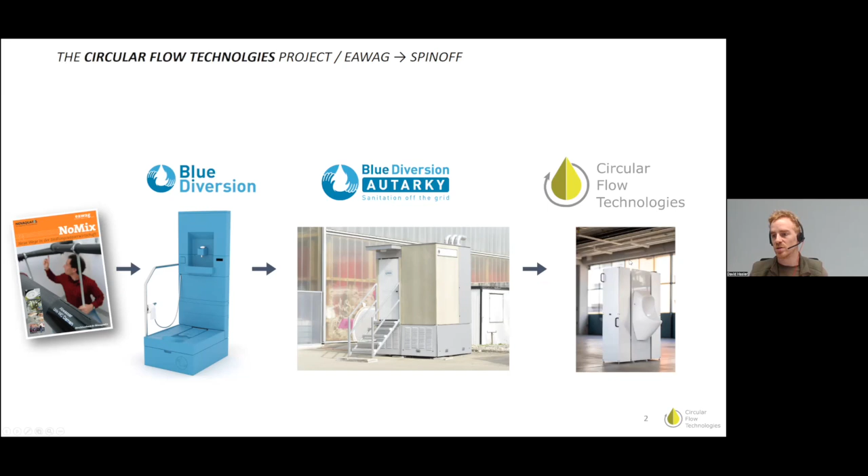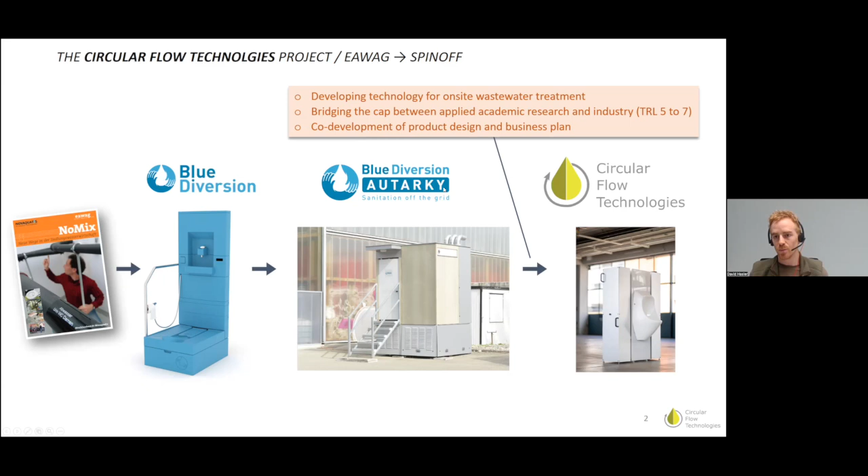So our first product-focused urine treatment is the picture you can see here. And with this step, we're also trying to bridge the gap between applied academic research and find a solution to commercialize this technology for different use cases. So there's a co-development going on between product design and business plan. But before we go to the business case, some very basic information about the treatment technologies here on this slide.

It's a 3 or 4 stage approach to urine treatment. There's a first step, stabilization, and also buffering. We have a micropollutant removal, although this is not in the current version implemented. It's still, let's say, lab-centered research going on at this step, but we plan to add this module in the near future. Then we have a volume reduction, which is based on low temperature evaporation, in a closed loop humidification-dehumidification approach, so we can recover water and a dry fertilizer product, which is a urea-based nitrogen and phosphorus fertilizer.

This system that we developed during the past 12 months was sort of a hybrid use case approach. We have a modular front end which can be connected to different source separation toilets and urinals, and it allowed us to test lots of different things in the lab and in an internal field test, but it wasn't yet developed for a specific use case.

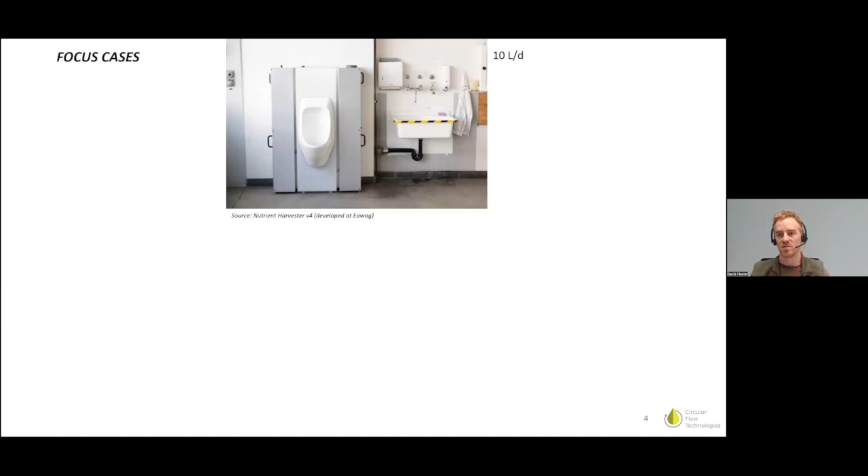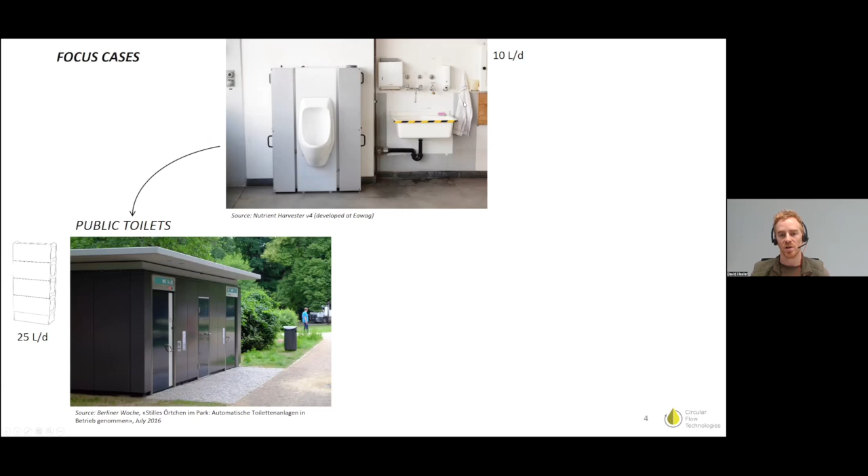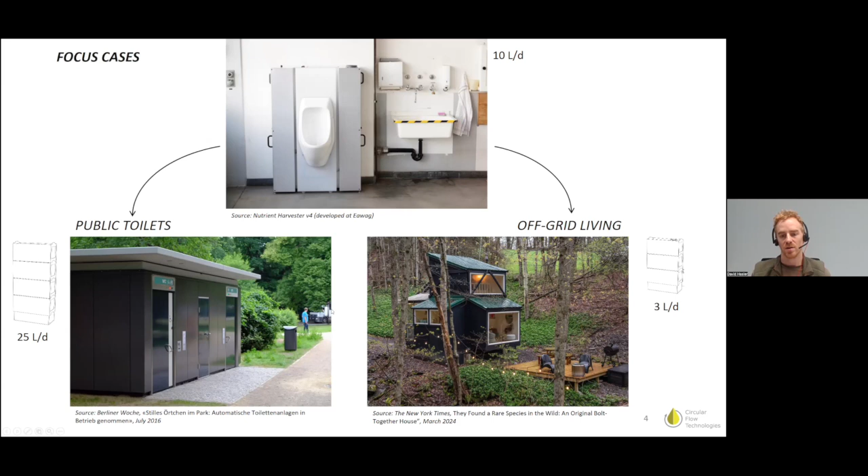So the step we did from here now was we decided to go to 2 different use cases. One is public toilets with a slightly bigger system, 25 liters compared to 10 liters per day in the current system. And the other one is a smaller system, 3 liters per day for off-grid living, what could be tiny houses or holiday cabins and places like this with a lower demand. Here, for both cases, the urine treatment is paired with different types of treatment for solids, which at that point I do not go into further detail.

We have a sort of bottom-up approach to tackling our different use cases, namely the public toilets. We started in this because it's an attractive niche market that has a high problem solution fit. There's a willingness to pay which is bigger compared to other cases. Cities are shifting towards ecological solutions. All in all, this is an attractive place to test the product or the technology. We plan then to scale this up.

This is rather for the future, that we can, after first technology development iterations, go to different use cases later on when the number of produced units increases and thereby the cost will come down.

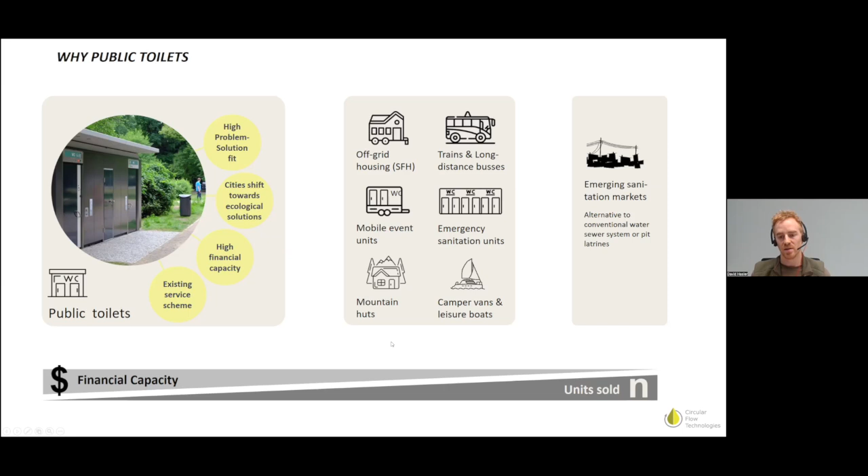So there's first a product vision workshop and a conceptual study in this pre-phase, and we figure out together whether these concepts are feasible within the envisioned test. It could also be that we iterate within this project. So this is sort of where we are at the moment. We have a technology that was mainly developed within academia, and to step out of academia with our first implementation partners, we're figuring out together how the solution actually should look.

So in terms of this product vision phase, there are a couple of approaches or scenarios that we discussed together with the city of Zurich, how we can come up with an interesting solution for the urban space here in Zurich. The first scenario was a standalone urinal, which is a mobile solution for public urinals. Scenario 2 would be an add-on for mobile toilets. Scenario 3 would be an integrated version, sort of a back-end solution for existing public toilet infrastructure that's rather civil engineering heavy, which could be outfitted with this back-end technology. And this is also where we settled for the first field test.

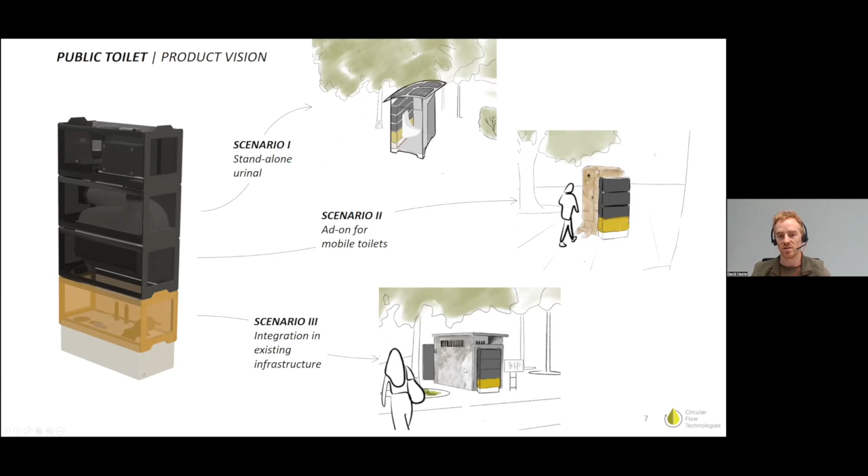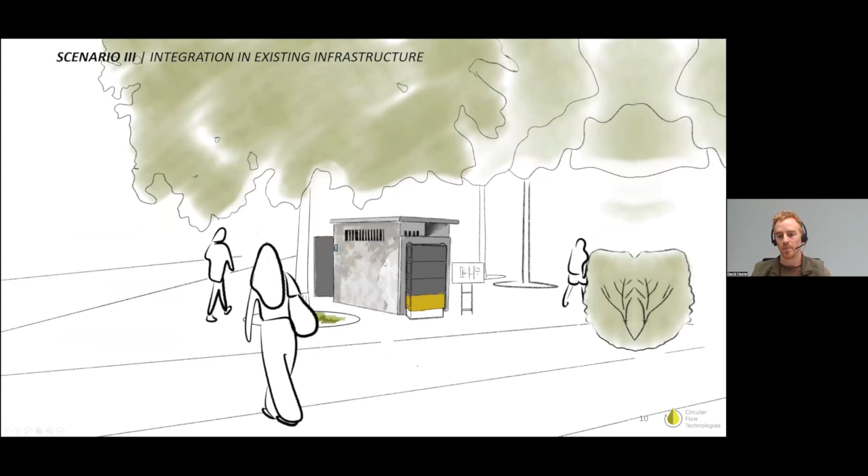This is a zoom into these three approaches again. So this last one with the existing infrastructure for a public urinal, we found out this is the best case to start. There's a public toilet with 3 urinals; 1 urinal will be removed and our urine treatment will be integrated in the newly given space. This is located very centrally in a public space. It will also allow us to add some info panels for communication and make this whole approach to circular sanitation in the public space visible and understandable.

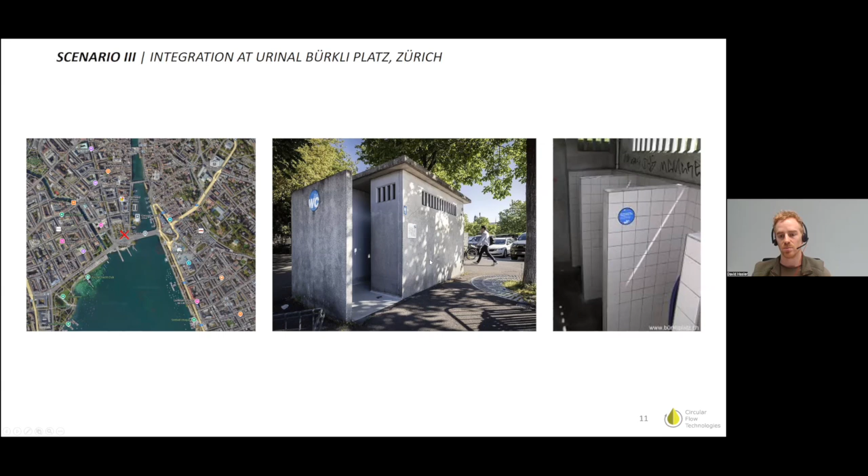In terms of the integration of the backend, we went through different solutions or propositions together with the city of Zurich: that we have an add-on backend in the existing space, we could have a sort of pop-up or add-on backend with additional urinals, leaving the existing infrastructure as it is, or we could integrate it within the existing infrastructure. This is, as I already mentioned, how we're going to do it, minus the third urinal, which they offered to sacrifice for this field test, so that we have a service room, which is very comfortable.

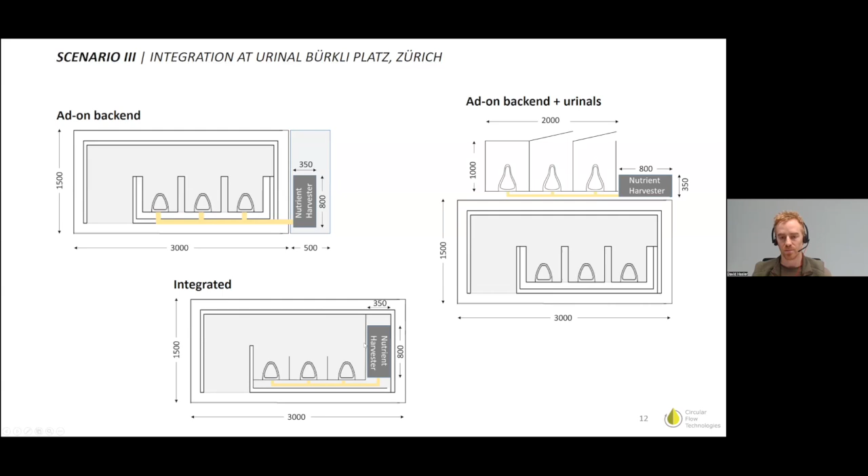This is a simple diagram of how it's going to work. We also decided to use a three-way valve because there's already a sewer connection given. Obviously, this is not the goal for the future, that the system depends on it, but for the first test we will have this bypass or fallback solution with the three-way valve, which will be activated in the case of something going wrong with our treatment system.

It will also have a connection via 5G probably to let us communicate and gather data, but also change parameters remotely. This is something we are anyway planning to integrate within our systems. That is, remote maintenance or remote monitoring will be possible, and this is the first time we'll actually be able to test this new control system and data monitoring system.

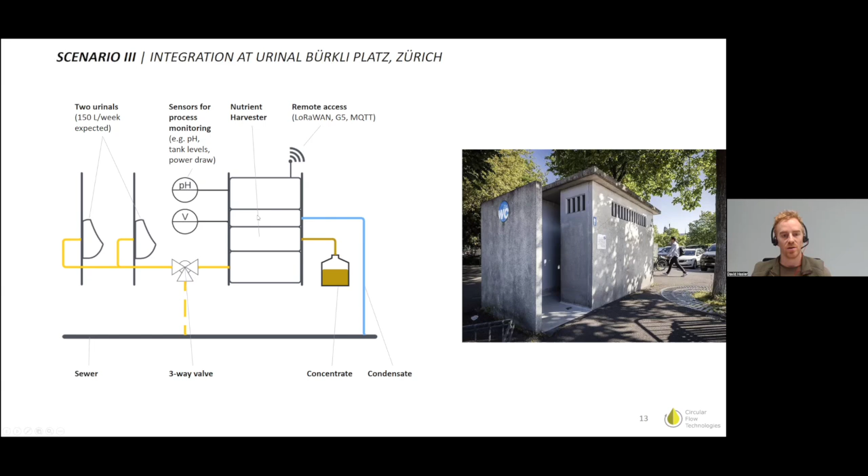So what are the goals? Learning, learning, learning. I guess I do not have to explain this to this audience. It's very important to make this step to the field and check whether it works, because it's not the same as in the lab. Obviously, is it useful? That's a bit of a provocative term, or it's useful to some people, but does it appeal to a wider audience? What are the reactions there? And also, how much does it cost?

We need an actual realized service and maintenance scheme that allows us to come up with closer values for this operational cost than just estimating them from where we are now. The backend integration by itself has some challenges, for which we are very closely collaborating with plumbing services from the city of Zurich.

And then our product and the process, it's also a test for long-term stability. As I already mentioned, remote monitoring and control is a new aspect where we want to make first experiences. And we also hope that this will be sort of a blueprint for other places and similar cases where we can scale up this approach. And then, also very important, what's the user acceptance? How well can we control the emissions of odor or noise? And, as already mentioned, the common interest also for people who are not familiar with this approach to circular sanitation.